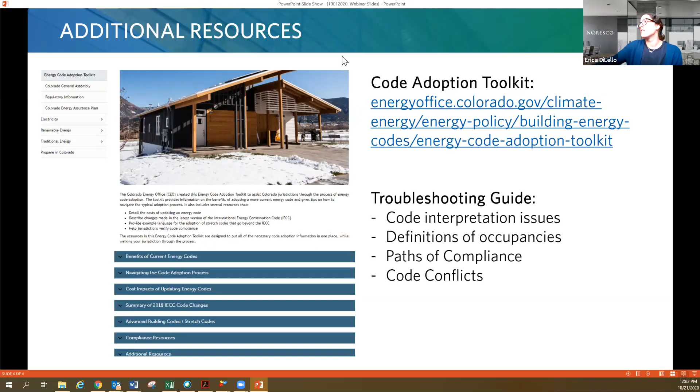Hope, I'm going to go ahead and stop sharing my screen so you can go ahead and share yours. All right, perfect. Okay, I'm just going to ask real quick, Erica, do you happen to see my slides right now? I think you have it, you need to reverse the display. Okay. So if you go back to sharing your screen, there's in the PowerPoint options, you can reverse the screens. Okay, did I fix it? Yep, perfect. Thank you so much for your assistance. No problem.

So thank you for having me here today. I'm going to go ahead, and we're going to have a chat about gray water, and we're going to talk about what Colorado is going to allow per the current Regulation 86.

Water is one of those subjects in Colorado that's kind of a touchy thing. Many people feel hands off about it. We don't have the rights for the water. The water has an obligation for other locations, other states, other countries. Colorado has kind of had a hands-off thought process when it comes to water as far as the residents of Colorado. But now there's an understanding, with all of the current conditions, of the obligation for the amount of water that we need to move along down the various rivers, for the compacts that are involved, and the sheer fact of being able to maintain the residents that we have now and have that water available for them. There's an understanding that we have to start looking at other options.

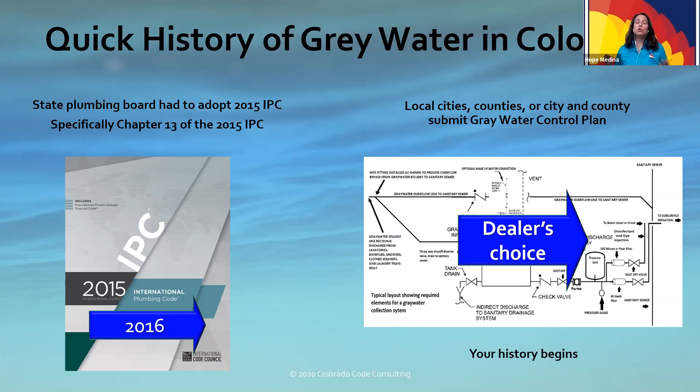So we keep throwing out the term gray water, assuming we all know exactly what it is. I thought I'd bring in some definitions, because while the concept is the same, different sources spell it out differently.

The Cambridge Dictionary says gray water is water that has been used before, for example for washing, and can be stored and reused again. Merriam-Webster says it's household wastewater, as from a sink or bath, that does not contain serious contaminants like those from toilets or diapers. Wikipedia gives a more encompassing definition: wastewater generated in households or office buildings from streams without fecal contamination, meaning all streams except wastewater from toilets. Sources of gray water include sinks, showers, baths, washing machines, or dishwashers.

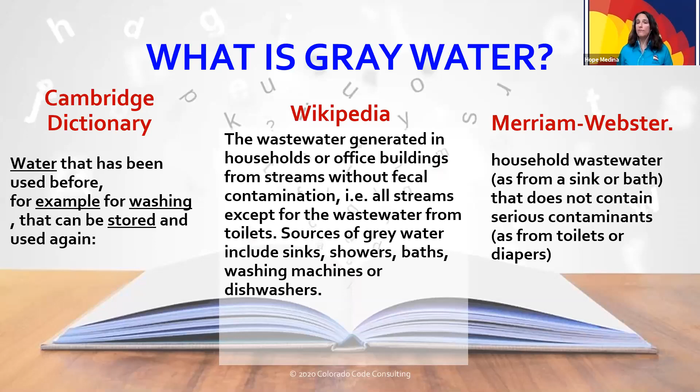Just because that's how they define it doesn't mean that's how Colorado defines it. Colorado defines gray water within Regulation 86 as that portion of wastewater that, before being treated or combined with other wastewater, is collected from fixtures within residential, commercial, industrial, or institutional facilities for beneficial uses. Sources of gray water are limited to discharges from bathroom and laundry room sinks, bathtubs, showers, and laundry machines. Gray water does not include wastewater from toilets, urinals, kitchen sinks, dishwashers, or non-laundry utility sinks.

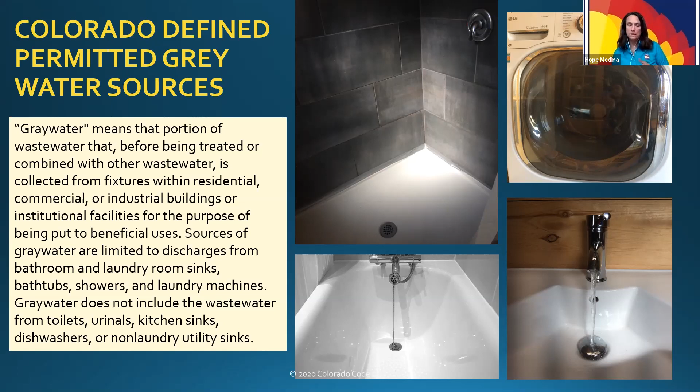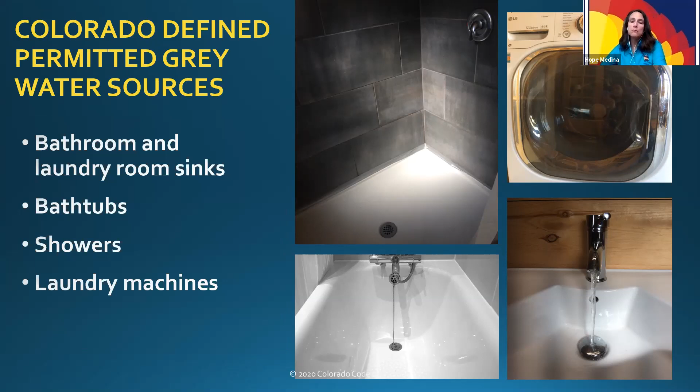So as you can see, Colorado defines it so that you can utilize a bathroom or laundry room sink, water from bathtubs and showers, and laundry machines are permitted within the state. The locations that are not permitted are toilets, urinals, kitchen sinks, dishwashers, and any non-laundry utility sink.

When they talk about non-laundry utility sinks, they mean sinks like ones you might find in a garage used for garage purposes. You want to make sure the contaminants you'd typically wash off there, like grease from working on a car, don't end up going into these gray water systems.

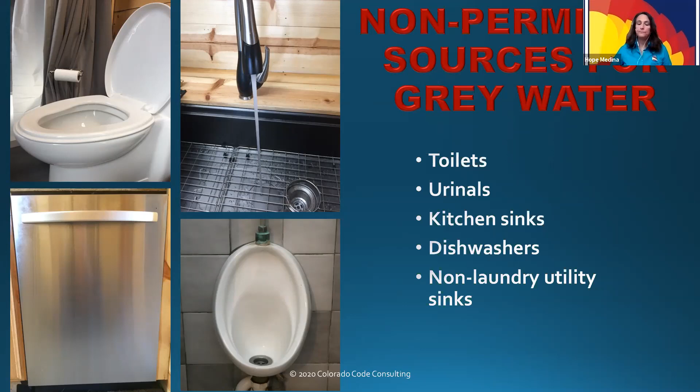Regulation 86 is a voluntary option for any city or county if they choose to adopt the use of gray water. What 86 does is tell you, one, that it's voluntary, so each jurisdiction decides whether this is something that will work for them. And it gives you the minimum design criteria and all the control measures that will need to be utilized for these gray water control programs.

I mention gray water control programs, and we'll get into that a bit later, but I think we really need to define exactly what that's going to be.

So what is the first step? If you're a jurisdiction thinking this could be a huge benefit for your community, because, say, your reservoir isn't so full and you want to make sure you have the water, what are the options? What steps can you take to be a community that can sustain itself while also providing the opportunity for future growth?

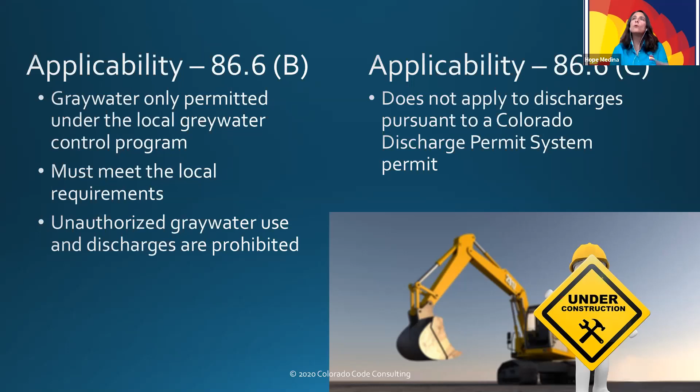You're not allowed to have gray water discharge in locations that are prohibited, and you cannot have it discharge if you happen to have a Colorado discharge permit system. And I believe that that has to deal with if you happen to have a, oh shoot, that word just went out of my brain, your own individual sewer system. So if you have that, at that point gray water may not be possible.

Now let's talk about enforcement, because I'm sure you're all on here just dying to know: one, how are you going to be able to enforce this? What is the enforcement mechanism? What are we going to do?

Well, the great thing is it's the city and county, or the county itself, and they are the ones that are exclusively responsible for the enforcement of your ordinance. So you as an entity are going to be enforcing and regulating your ordinance. The state does not really come into effect here.

Where the state is involved is they oversee the statewide implementation of this program, meaning, okay, so you have adopted a gray water control program ordinance. They're going to make sure that you provide that ordinance to them within 60 days of it being adopted. So that's something that they would take a look at. And then they're going to review the ordinance and make sure that things are actually per how the regulation states. So those are some of the oversight that you're going to see from the state, but basically the enforcement comes from the entity itself.

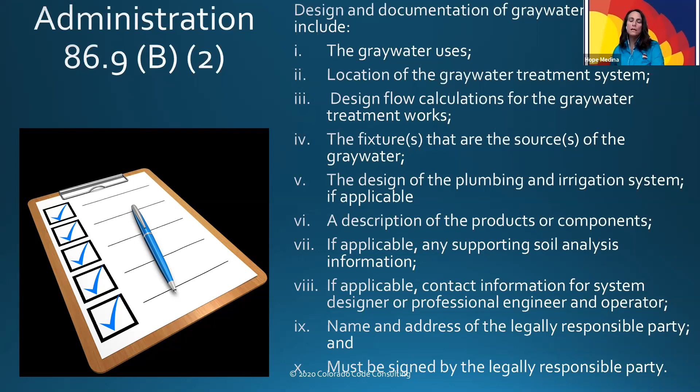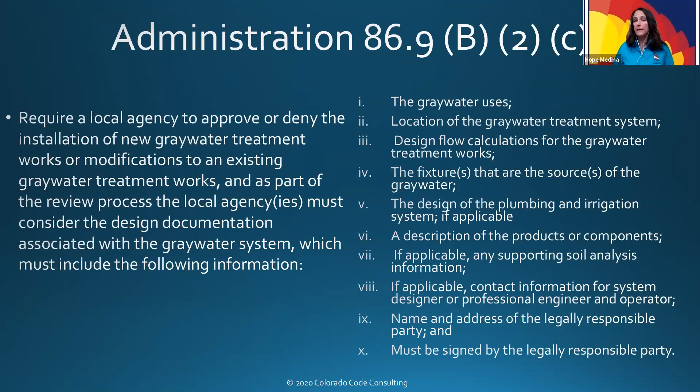So when we start talking about items to approve or deny the installation of it, again, those same 10 items become really a part of whether you're going to approve or deny it. If it doesn't meet any of these 10 items that are required, then at that point, you have the option of being able to deny the use of the gray water system.

Now, we need to talk a little bit about discontinuing local gray water programs. So let's say your entity thinks it's a great idea, and you're really hoping that this is going to be one of those solutions that you need, but there are some things you have to understand.

Let's say you're using it for one category over the other. There may be a possibility that less water will be going into the sewers, and so your sewer purveyors may have some issues with the lack of water. Their systems are not able to run in the fashion they were designed to, so they kind of supersede a little bit. If there is an issue and the entities understand we just can't continue this, you may discontinue your gray water control program.

Now, if you do that, you do have some options. In the regulation, you are provided with 3 options. You can either require that it is physically removed or permanently disconnected, or you're going to regulate what your existing gray water systems are under what would be considered a limited gray water control program.

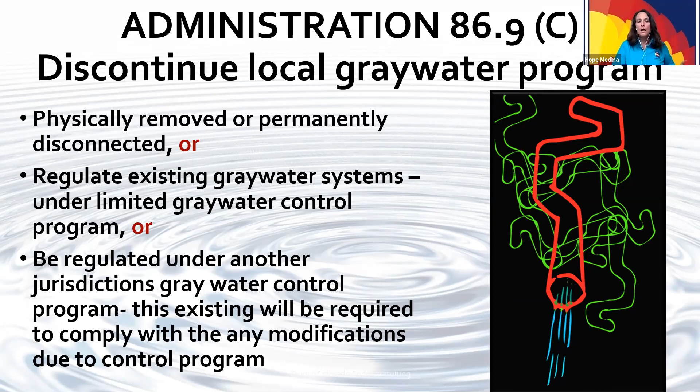So let's talk about these allowable gray water use categories. The first one is category A, and that is single family, and the use you can utilize the gray water for is subsurface irrigation. For that to happen, you have to be a single family user, you have to have a design flow of 400 gallons per day or less, and it can only be utilized for outdoor subsurface irrigation within the confines of that legal property boundary. This is extremely important - remember earlier when I mentioned complaints, this would be an area where complaints could potentially manifest if it was not confined within its own property boundary.

Now, the second category you have is category B, and it's non-single family subsurface irrigation. For this particular category, it's for non-single family users, you have a design flow of 2,000 gallons per day or less, and it can again only be utilized for outdoor subsurface irrigation within the confines of that legal property boundary.

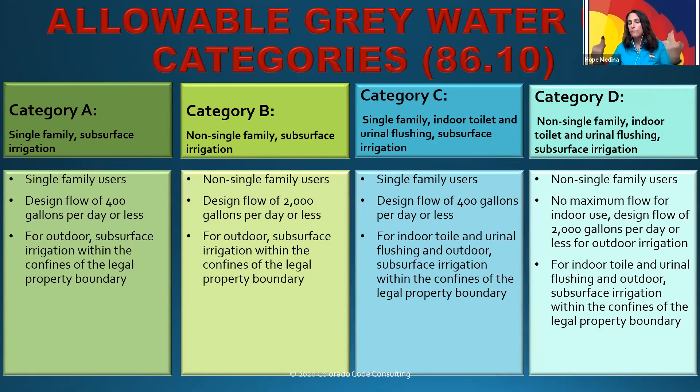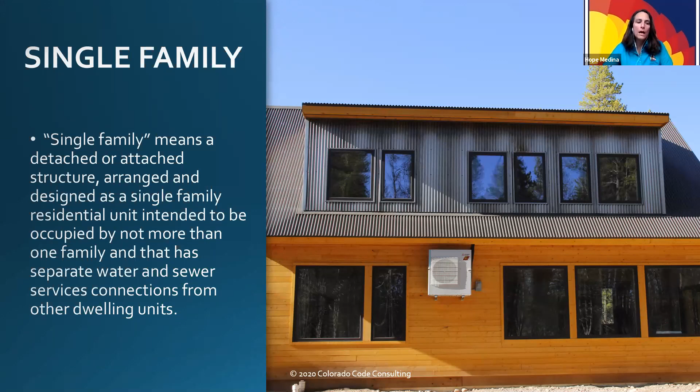So we talked about single family. Single family, as defined within the regulation, means a detached or attached structure arranged and designed as a single family residential unit intended to be occupied by not more than one family, and it must have its own separate water and sewer service connections to that dwelling unit. So whether it looks like this or that, as long as it has its own sewer and its own water, you're good to go and can utilize a gray water system.

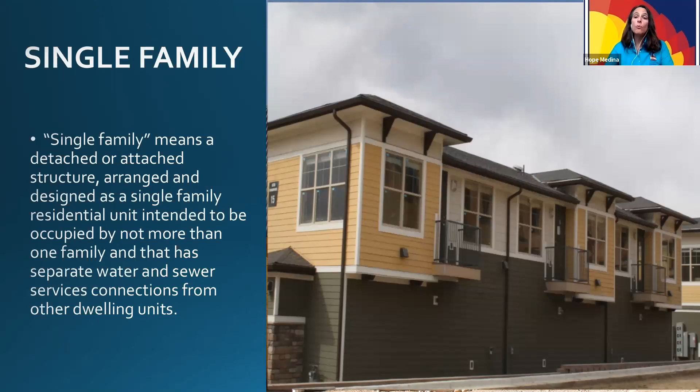Now, non-single family, as defined within the regulation, is nothing - there's no actual definition as far as what is a non-single family. I think it's very similar to what you'd find in the IECC: you have a definition of what a residential building is, and commercial says anything that doesn't fall under residential. So that's kind of what we're looking at here. While it doesn't explicitly say anything that's not single family is non-single family, I think we can all infer that's the intent. So a non-single family is commercial or attached dwelling that does not have its own separate water and sewer.

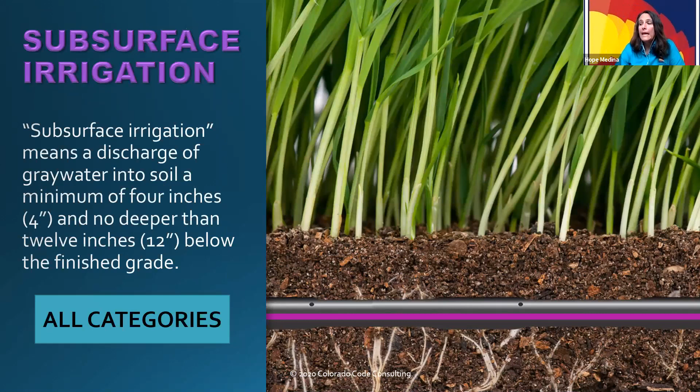Subsurface irrigation, as defined within the regulation, states that it is a means of gray water discharge that has a minimum of 4 inches below the surface, but not more than 12 inches below the surface. So whatever your finished grade is - what you'll often see is just a pipe with some holes, water moves through it and feeds it, it's all underground, contained underground. So there's no possibility of it becoming an aerosol type up in the air, because there's always a concern about potential pathogens. This is why it's contained within the soil itself, and it's not available for sprinkler systems. But this is an option for all of the categories - all of the categories state subsurface irrigation.

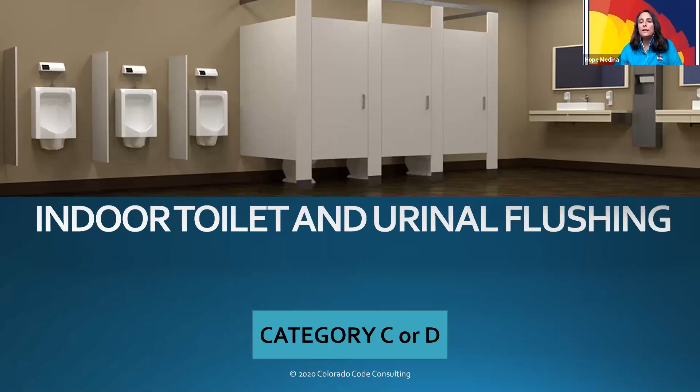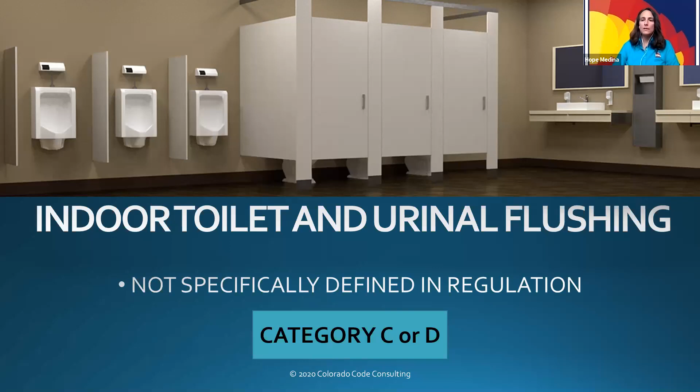Now, indoor toilet and urinal flushing, as defined within the regulation - it's not actually defined, but I think we can all pretty much understand what they're calling for. It's water that's going to be utilized to flush a toilet or a urinal. And this option is only permitted if you choose to utilize category C or category D.

So here's where it might get a little interesting for the code officials on board here: if you go into 8612, this is where it starts to get into a lot of the fun stuff for us. In design criteria A, section A, it states that it has to meet the regulations of the Colorado Plumbing Code. And the Colorado Plumbing Code currently is the 2015 IPC, which happens to contain chapter 13. So we are good there.

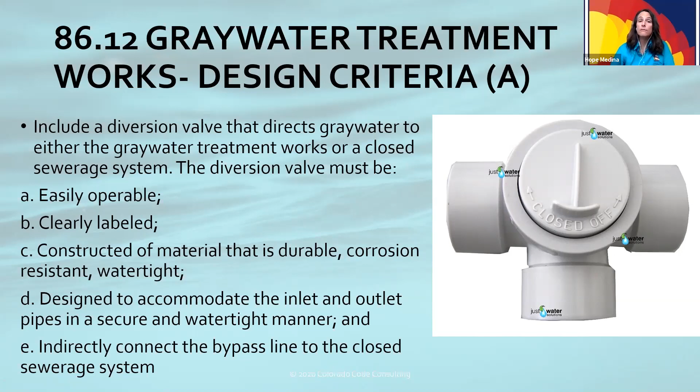Your treatment design flows have to be calculated for your peak gray water production if upstream of your storage, or no tank is used. Keep that in mind. Plumbing that allows the treatment process of storage tanks cannot be bypassed prior to the gray water use. You're going to have to include a diversion valve that directs the gray water to the gray water treatment works, and it has to be easily operable, clearly labeled - a lot of things we're very accustomed to when looking into the IPC, saying label it, tell me what it is. The same thing is in effect here for your diversion valve.

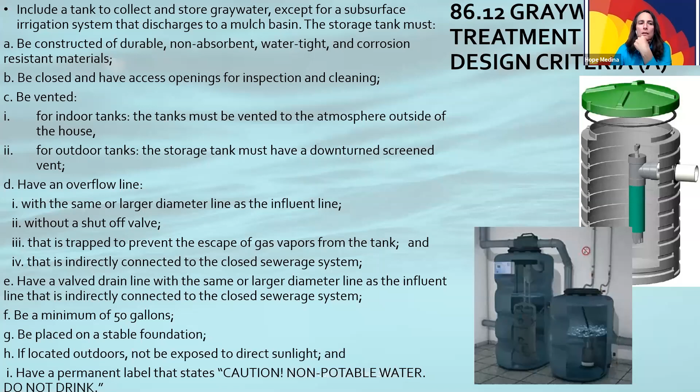Now, your storage tank has a whole lot of provisions that it needs to demonstrate. And when you start looking online at some of the gray water storage tanks, a lot of them already have all this information shown on them - at least when I was doing my research, that was something that was very readily able to find. So I don't think this is going to be an issue.

Now, if you happen to utilize category C and D for gray water for toilet and urinal flushing, there are some requirements you need to be aware of. You're going to have backup potable water - make sure you have something obviously as a backup. And then you also have to make sure you do not have any uncontrolled cross connections between the potable water and the gray water treatment. That's for both what they're calling non-public and public, which is kind of, in my head, more of residential and commercial, right?

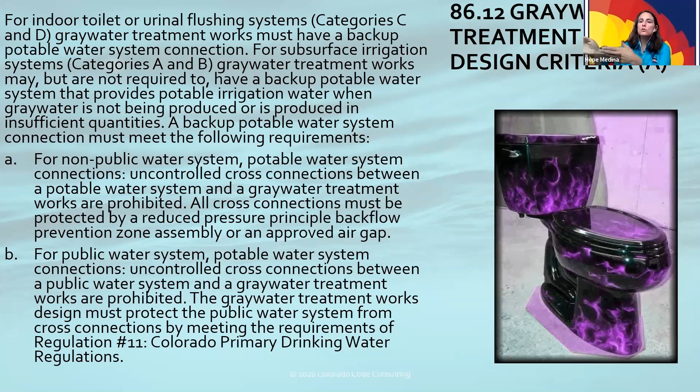Gray water treatment works: you cannot reduce the design capacity when dealing with on-site wastewater treatment systems or any domestic wastewater treatment works. You have to make sure you have the correct piping designation identified, and show what direction the flows are going.

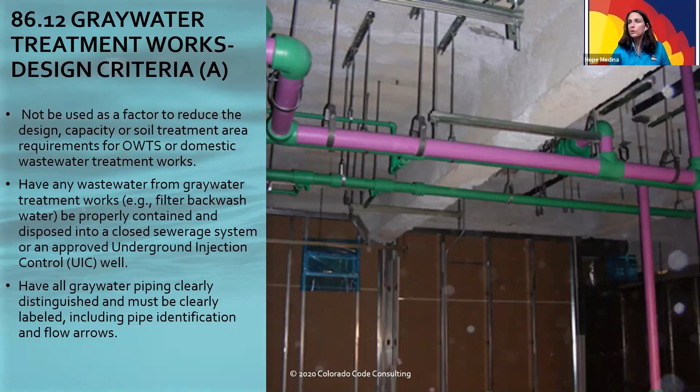For us in Colorado, one important thing is making sure these systems aren't located in the 100-year floodplain, and if they are, they exceed FEMA's requirements. They can't be in the floodways, though they can be in the floodplain. Everything must be confined within the legal property boundary, and cannot be within an easement.

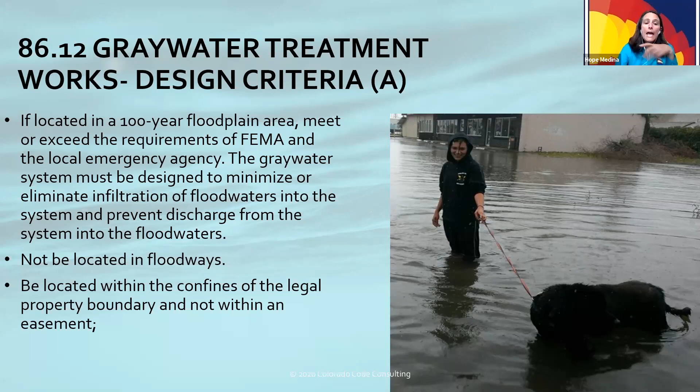There's very specific design criteria for subsurface irrigation systems, under 8612B. It talks about setback requirements, knowing where the tank is, where the piping is, where the discharge is. It has to be so many feet from the property line, so many feet from a well if you have one. There's a table that gives you all of that information, plus the protocols so you can size everything appropriately.

It also gives a table with information on the type of soil you're working with, so you want to make sure it's a soil type that can handle this. And if you choose to utilize a mulch basin approach for the irrigation system, there are requirements for that too.

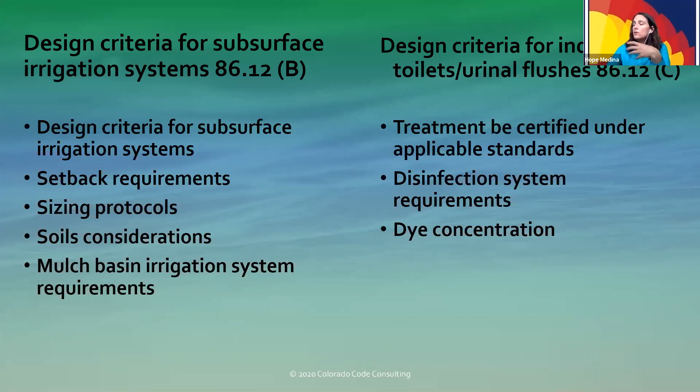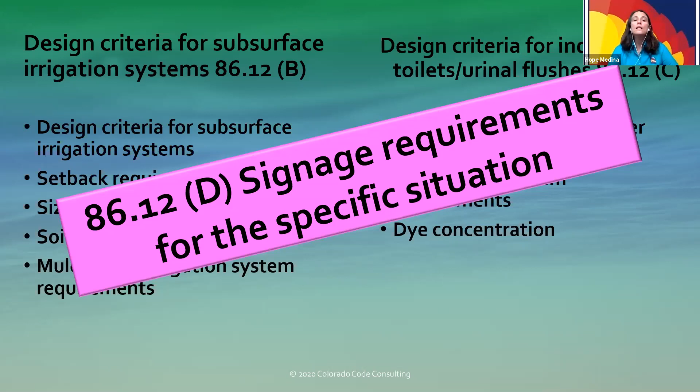8612C talks about the criteria for using it for toilets or urinal flushes. You have to have a disinfectant system, and there's actually a dye concentration requirement, so there is recognition. There are also a lot of requirements for signage, making sure it states that gray water is being used for irrigation, and it must follow all of these assignments. Whatever the case, signage is required.

Last but not least is the requirement for operation and maintenance manuals. Because here you go, you design this system, the building owner walks in, says 'oh great, we have a gray water system,' and has absolutely no idea how it works. So there are requirements to show them how it works, have a maintenance manual there so the information is provided to the building owner so it can be maintained properly, which is what we all hope for.

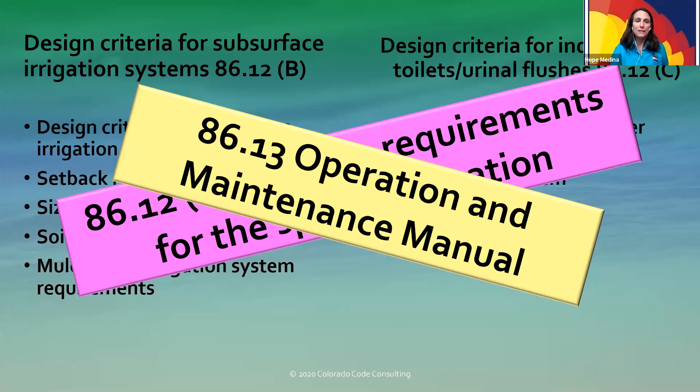There are more items you're going to find within this regulation. We could do an hour on each of these particular subsections very easily, so this is just a brief overview of what it says.

So what is the next step? Now that you've decided, given all that information, you say 'hey, it doesn't seem so bad, what do I need to do?' We're going to make that adoption, that ordinance.

Now we have to decide how and who will enforce the program. I think this is probably one of those areas that really pops up for people: who's responsible? The building official's first thought is, my department is so understaffed as it is, how am I going to add one more thing for them to worry about?

The really nice thing is, we have to remember that enforcement is adopted by the entity, so that entity is your jurisdiction. Often it's not the building department that is actually in charge of enforcement or implementation. When I was reaching out to a few jurisdictions that have submitted a gray water control program, the building department is involved, but they're not overseeing it or implementing it. They're part of it, because this is a joint venture between everyone, but they're not the one responsible for it.